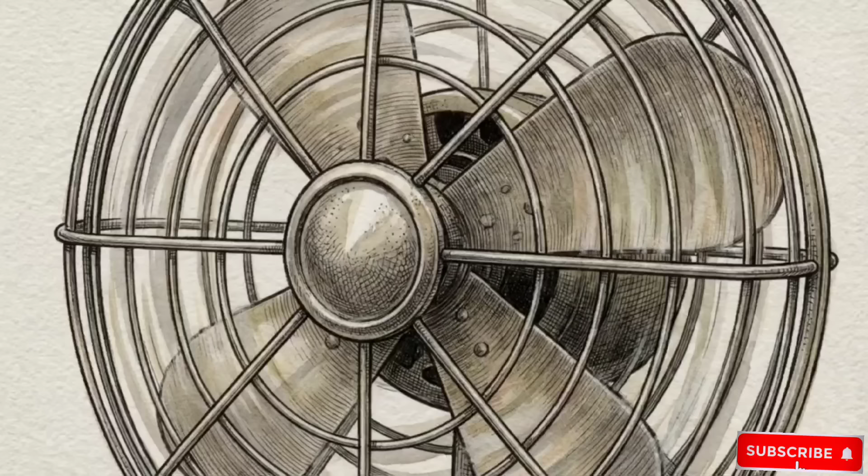On a sweltering summer afternoon, there's nothing quite as refreshing as sitting directly in front of a table fan as it starts to spin. The mechanics are simple: physical wind.

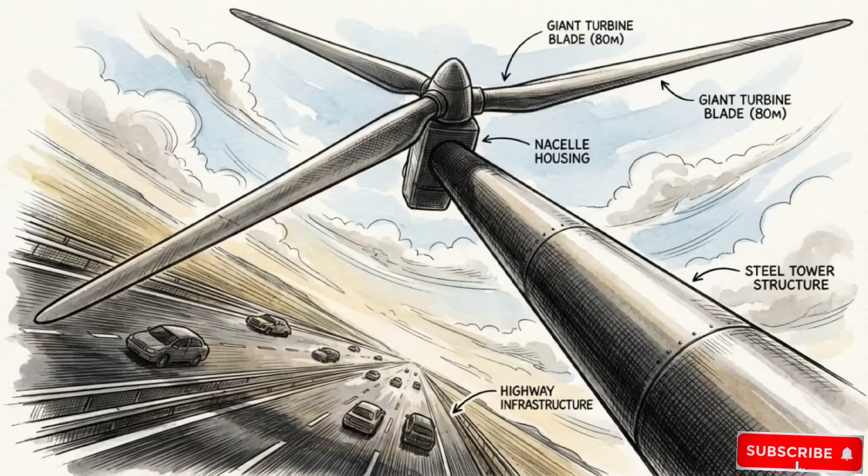Out on the highway, standing hundreds of feet tall, is a machine that works the other way around. A wind turbine operates in reverse. Instead of consuming electricity to move the air, it allows the moving air to push its blades and uses that physical rotation to generate electricity.

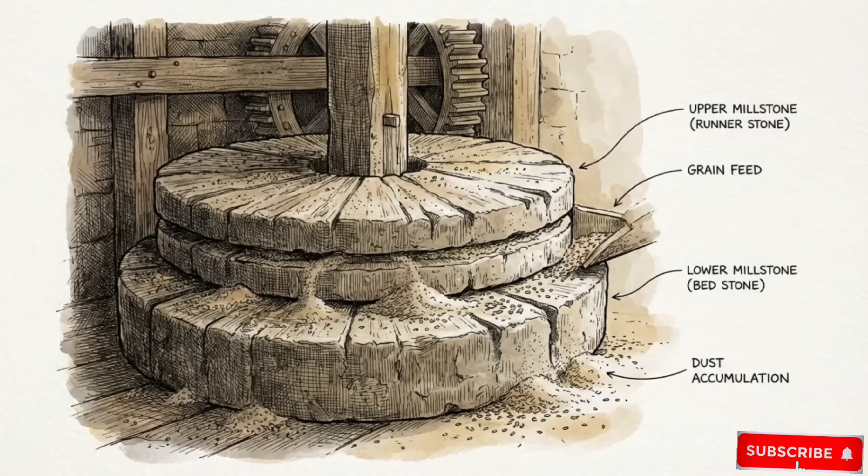Humans have captured the breeze for centuries. Traditional wooden windmills, like the classic Dutch designs, use the wind's pushing force for direct physical labor, spinning heavy stones to grind grain or pump water.

Even in a brisk wind, those massive white blades turn quite slowly, often only 15 to 20 times a minute. It looks like a gentle, easy spin. How can a rotation that slow possibly generate enough high-voltage power to light up hundreds of homes?

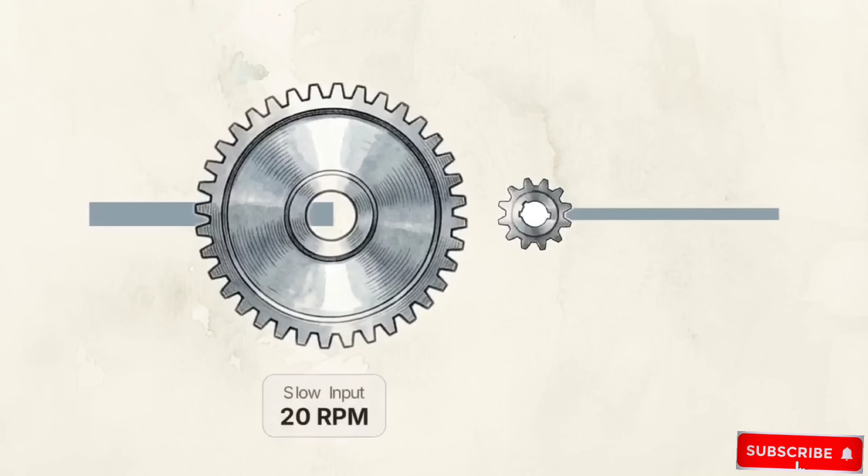The turbine uses internal gears to multiply that slow movement into the intense speeds needed to create electricity. To see how that works, we first have to look at the blades.

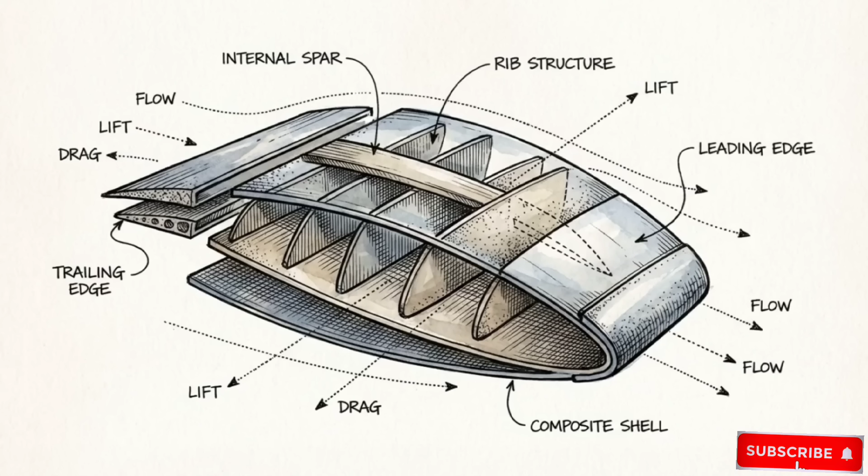These are massive, aerodynamic structures shaped like airplane wings, designed to create lift as the air flows over them. Surprisingly, these gigantic blades are not bolted rigidly in place. They can rotate along their own length, twisting back and forth depending on the weather. By adjusting this angle, the blade's pitch, the turbine catches the maximum wind available.

It's also a vital defense. During a violent storm, the blades feather entirely flat, letting heavy winds slip right past, keeping the turbine from spinning too fast and causing damage.

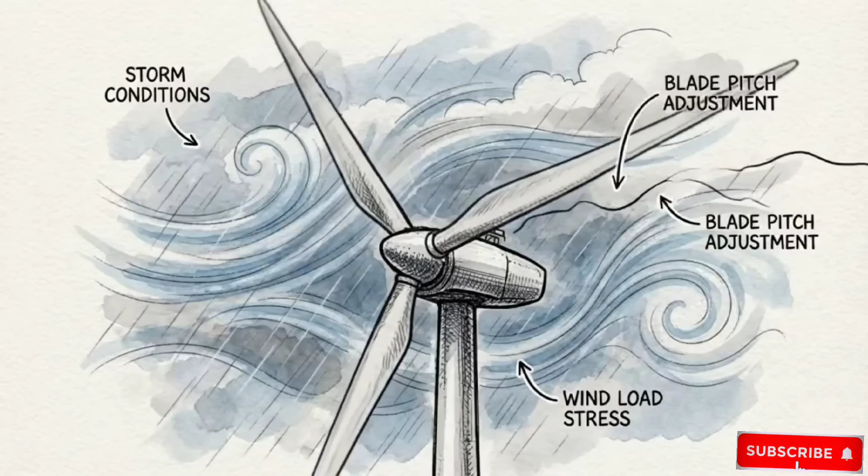Because it can constantly adjust its blades to match the weather, the turbine acts as a reactive machine, responding to nature in real time. This schematic takes us inside the outer casing, the nacelle. Here, we see how the machine converts motion into power.

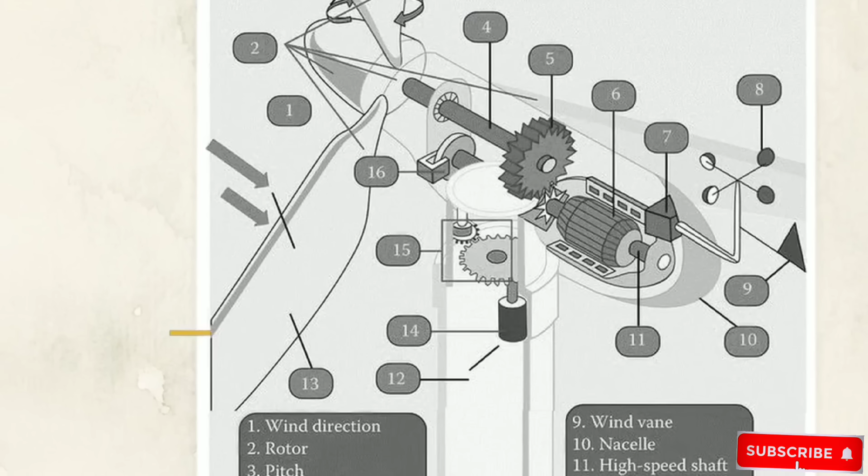Right behind the hub is component 4, the low-speed shaft. Bolted directly to the blades, it turns at a sluggish 20 rotations per minute. That brings us to our core problem: 20 rotations per minute is far too slow to generate commercial electricity for the power grid.

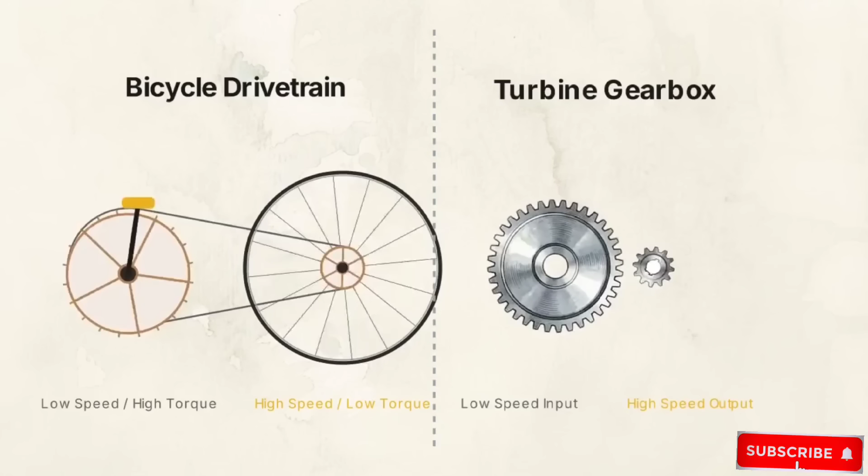Think about riding a bicycle. When you shift gears, a large gear connected to your pedals turns a much smaller gear on the back wheel, making it spin much faster than your feet are moving.

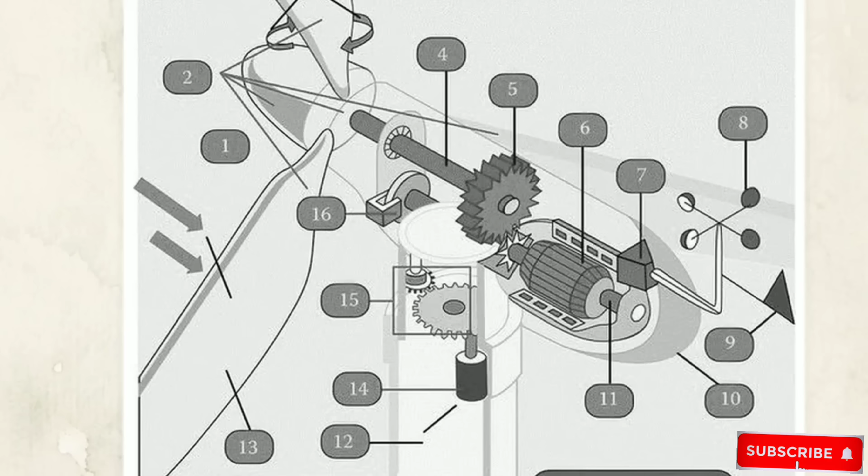Component 5, the gearbox, does the exact same thing. It takes that sluggish 20 rotation per minute input, runs it through interlocking gears, and outputs a steady 1500 rotations per minute. This fast spinning shaft drives component 6, the generator, whipping magnets around coils to create electrical current.

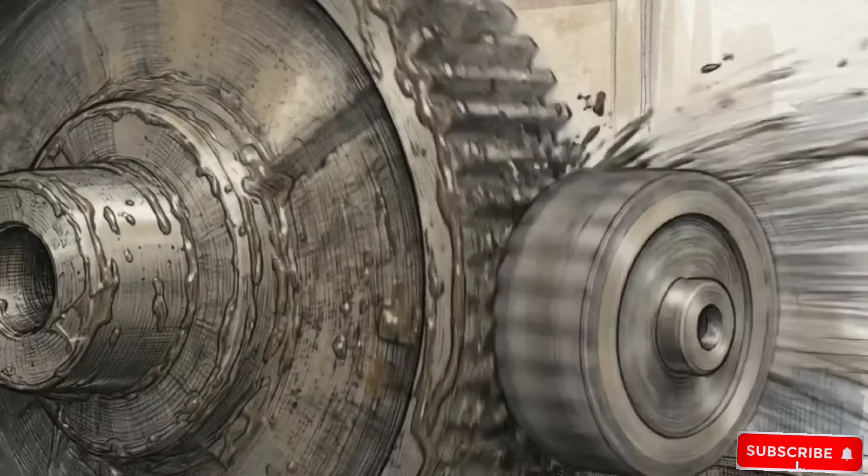The gearbox is the critical bridge. It links the slow, massive forces of nature to the high-speed demands of our electrical grid. But there is one more major challenge.

The wind rarely blows from the same direction all day. If the wind hits the side of the blades, they won't turn efficiently. To solve this, a yaw system rotates the entire housing on top of the tower, tracking the wind.

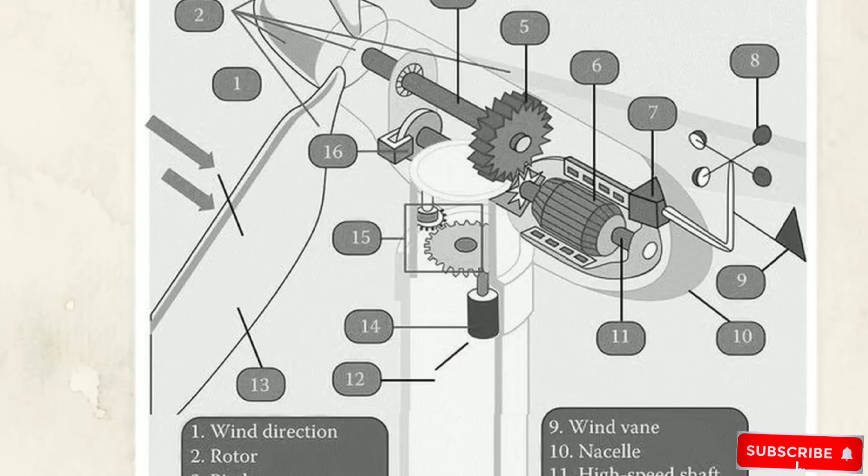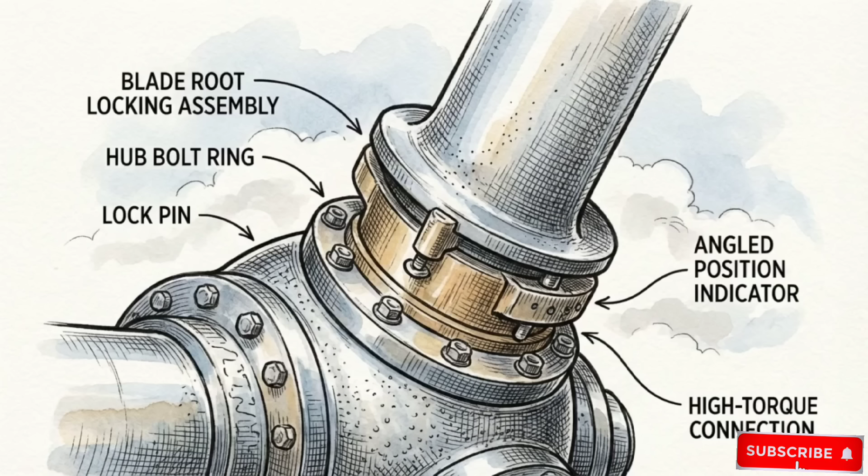On the back, a wind speed sensor and wind vane at numbers 8 and 9 tell the motor exactly when to rotate into a better position. With sensors reading the air, the yaw turning the head, and the pitch angling the blades, the machine operates on its own, tracking the weather without human intervention.

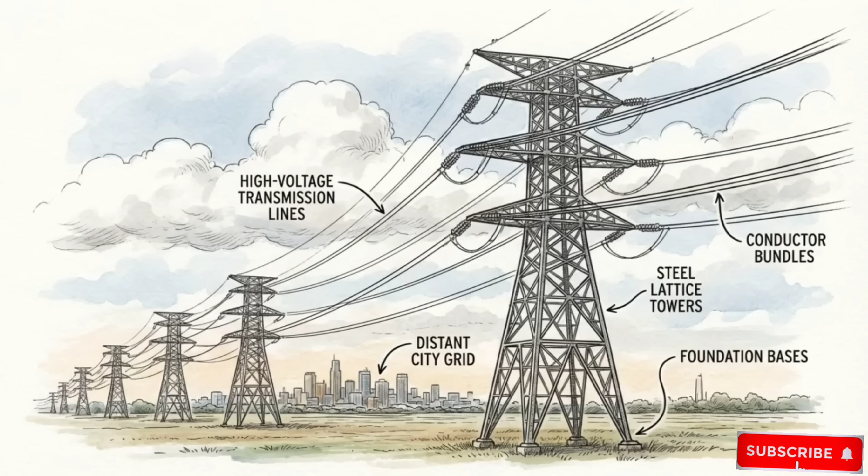From that generator high in the sky, electricity travels down thick cables hidden inside the tower and routes directly into the local power grid. When dozens of these machines are grouped into a wind farm, they pool their output to provide clean, renewable energy to thousands of homes simultaneously.

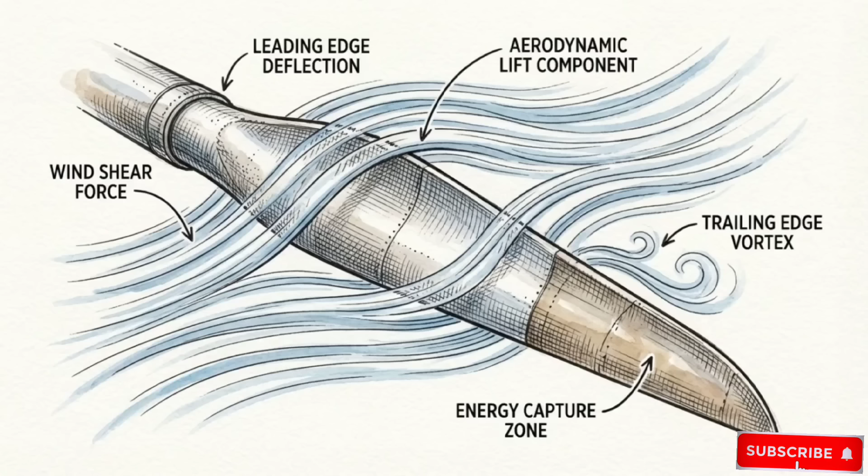It takes 3 distinct steps: smart blades capturing the breeze, gears multiplying the speed, and magnets generating the power. Next time you see these machines in the distance, that slow rotation won't look so lazy. You're seeing a high-speed power plant at work, harvesting energy directly from the invisible currents of the sky.